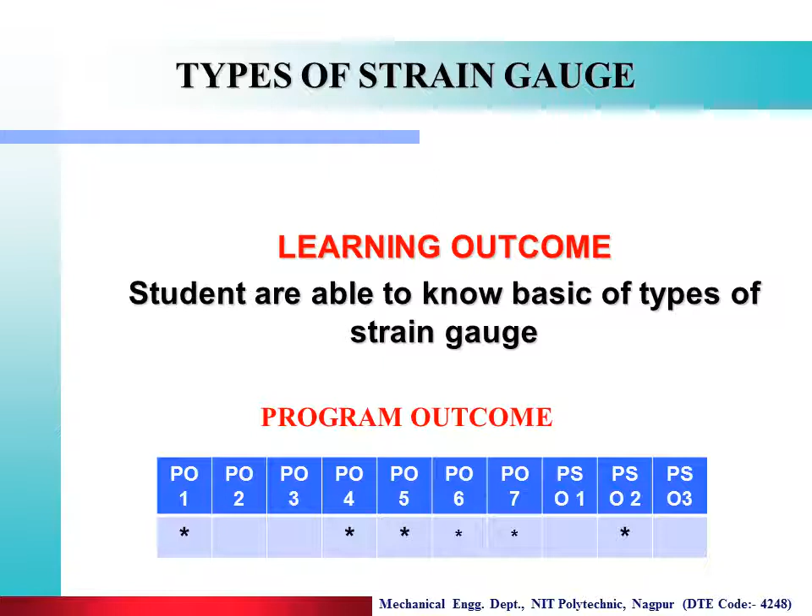Now, there are various types of strain gauges for measuring the strain.

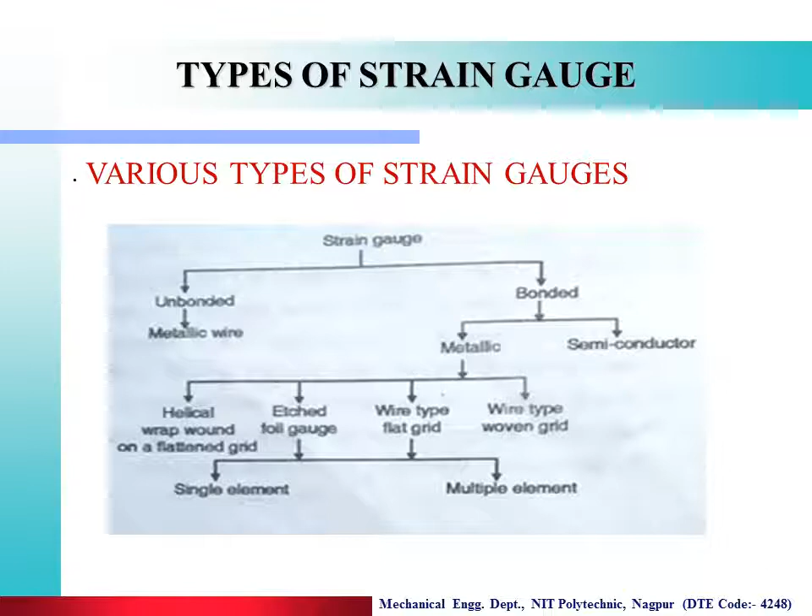So these are the various types of strain gauges. Now we see one by one various types of strain gauges. Now we see the requirement of strain gauges. So it should be extremely small size and negligible mass.

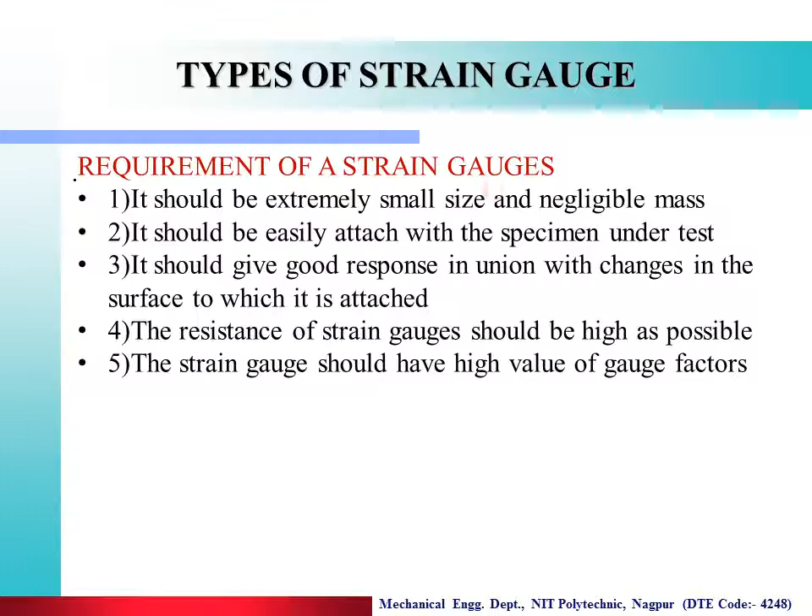So those are the various requirements of strain gauges. Now the various materials used for strain gauges.

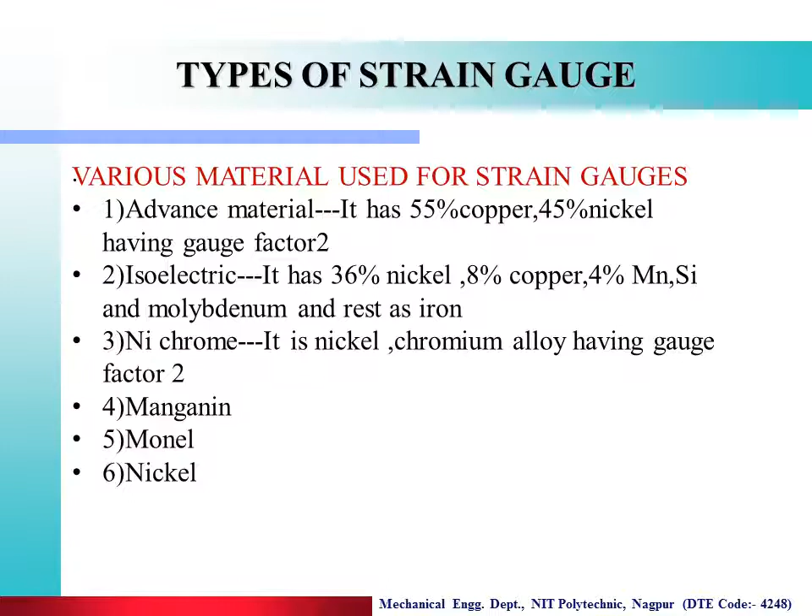Then nickel chrome, that is a nickel chromium alloy having a gauge factor of 2. Manganin, then monel and nickel. These are the various materials that we are using for manufacturing of the strain gauges. Now we see what is meant by gauge factor. So it is the ratio of change in resistance to the strain.

So change in resistance divided by original resistance, that is the change in resistance, divided by DL, that is called the gauge factor.

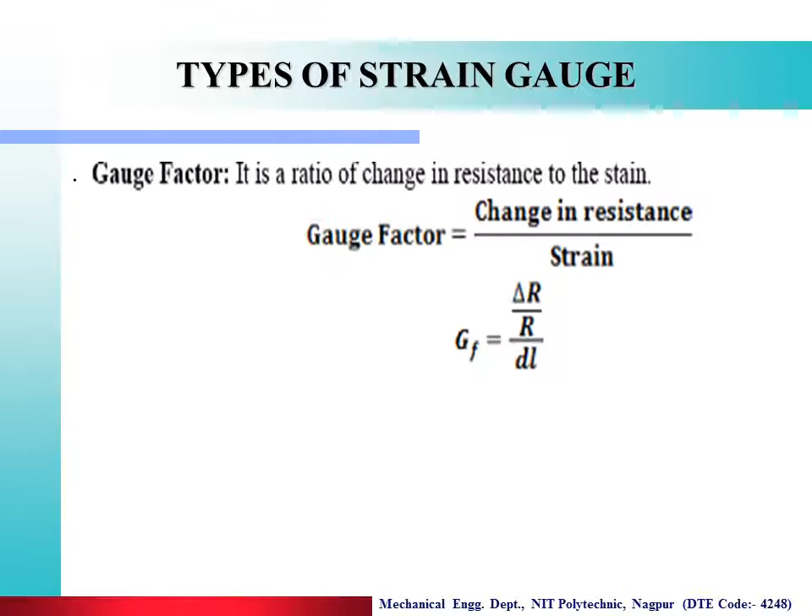Now desirable characteristics of bonded type resistance strain gauge.

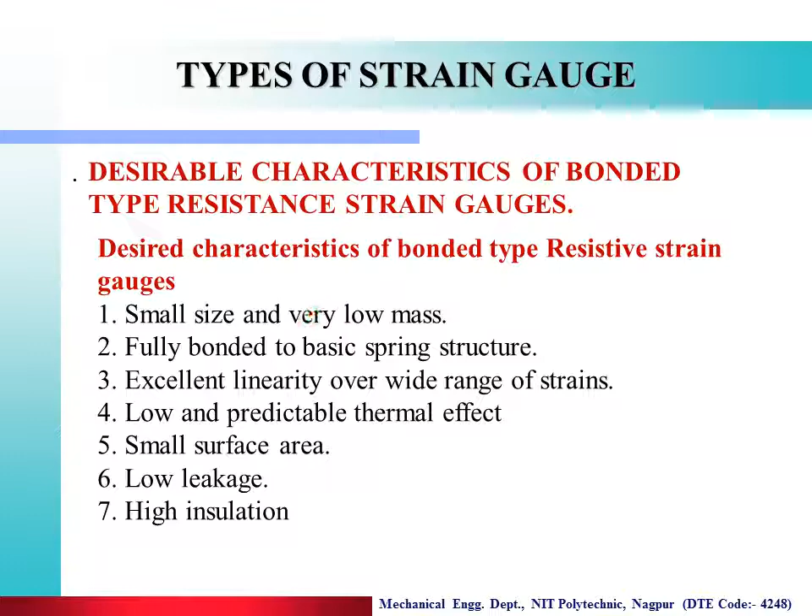Now we see the working and application of bonded strain gauge. So this is the diagram of bonded strain gauge. So why is it called bonded? Because all these coils are bonded on this plate. That's why it is called as a bonded strain gauge.

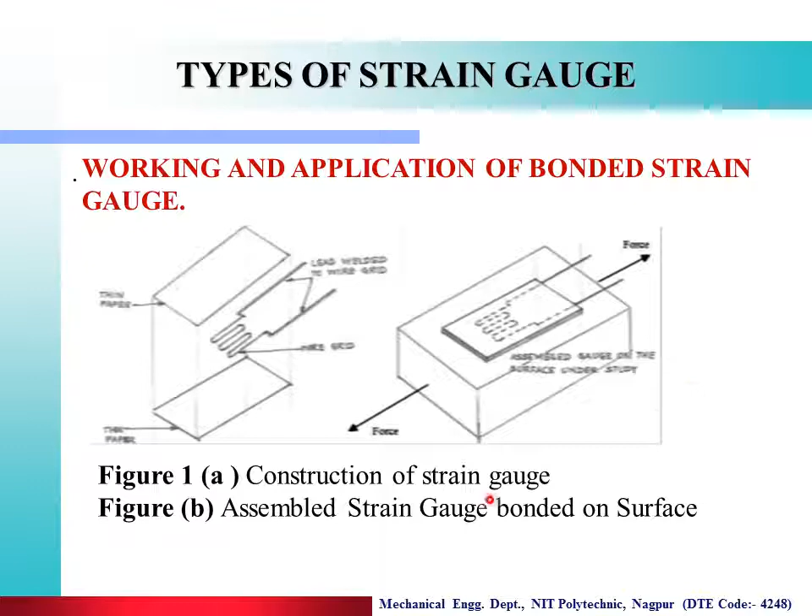So what is the grid like? It is like that. Okay, this wire grid is bonded on this plate. Now we see the construction and the working of a bonded strain gauge. Now we see working. With the help of adhesive material, the strain gauge is pasted on the structure under study.

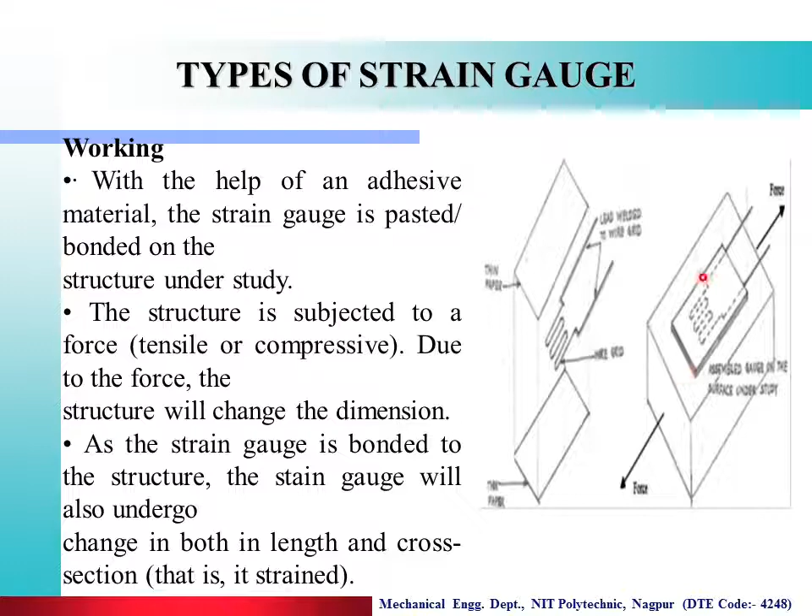The strain, the change in dimension, changes the resistance of the strain gauge, which can be measured with a Wheatstone bridge circuit.

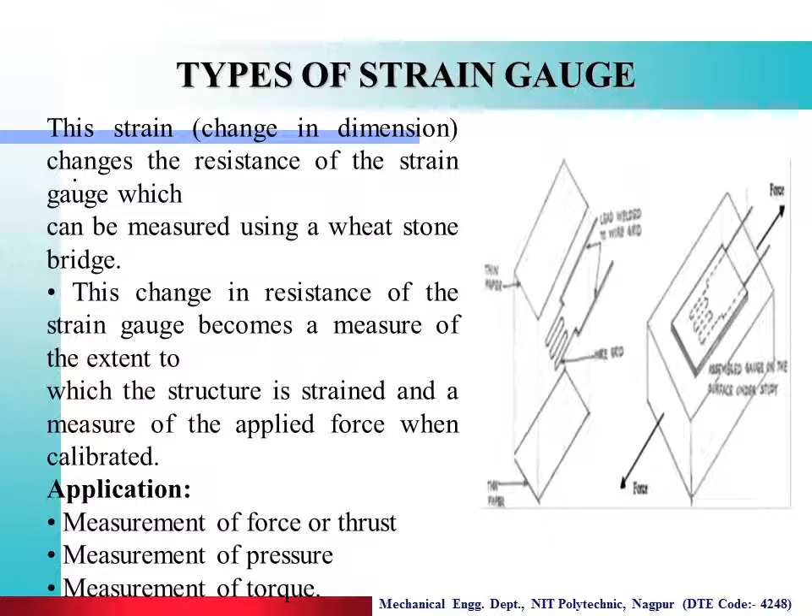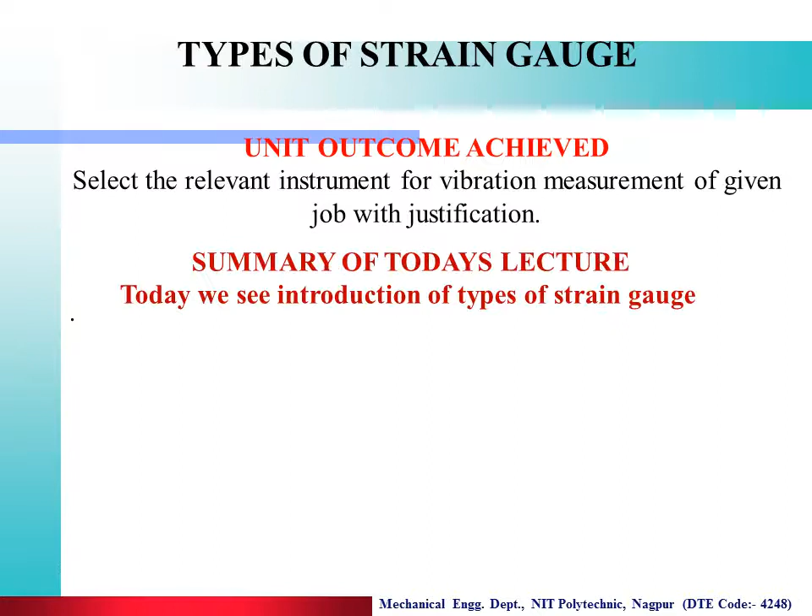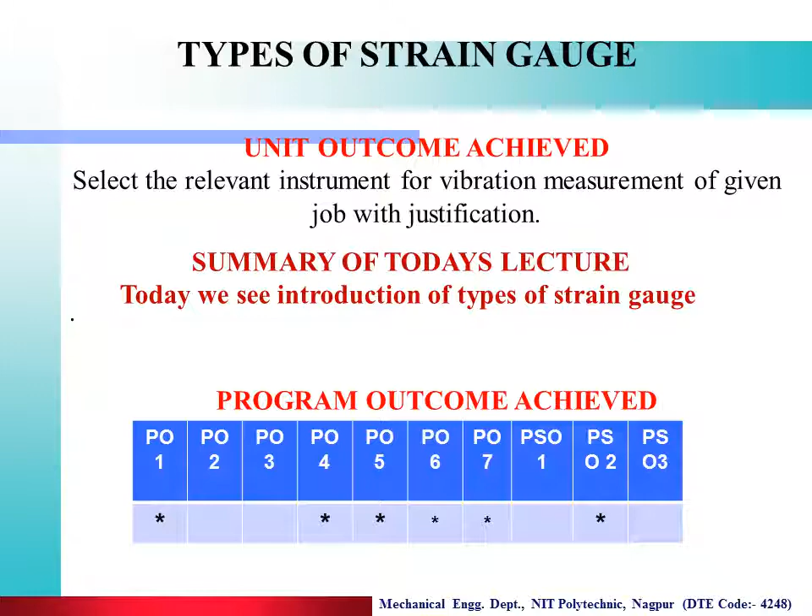The unit outcome achieved in today's lecture is: select the relevant instrument for vibration measurement of a given job with justification. Summary of today's lecture: today we saw an introduction to the types of strain gauge. Program outcomes achieved are PO1, PO4, PO5, PO6, and the program specific outcome is PSO2.

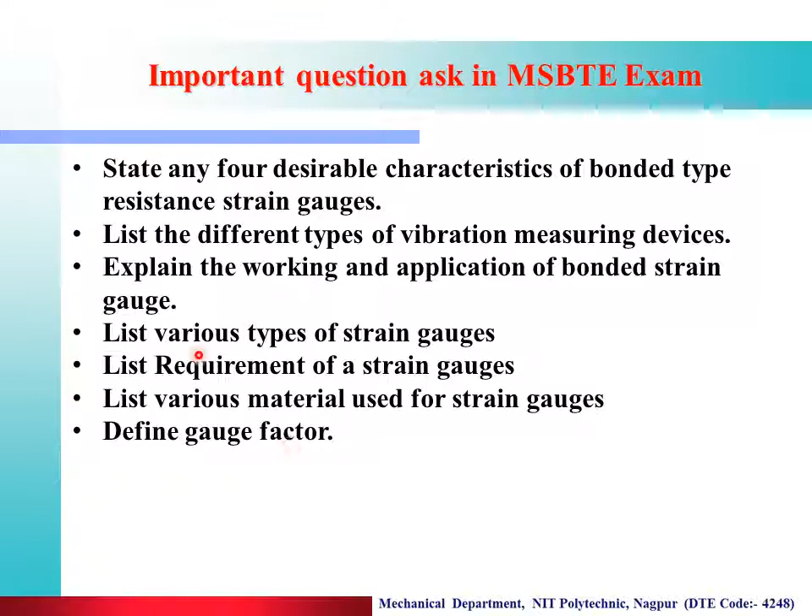The various important questions asked in the MSBTE exam are: state any 4 desirable characteristics of bonded type resistance strain gauges. Second, list the different types of vibration measuring devices. Explain the working and application of bonded strain gauge. List the various types of strain gauges. List the requirements of strain gauges. List the various materials used for strain gauges and define gauge factor. So these are the various important questions asked in the exam.

In the next lecture, we will see the next type of strain gauge.